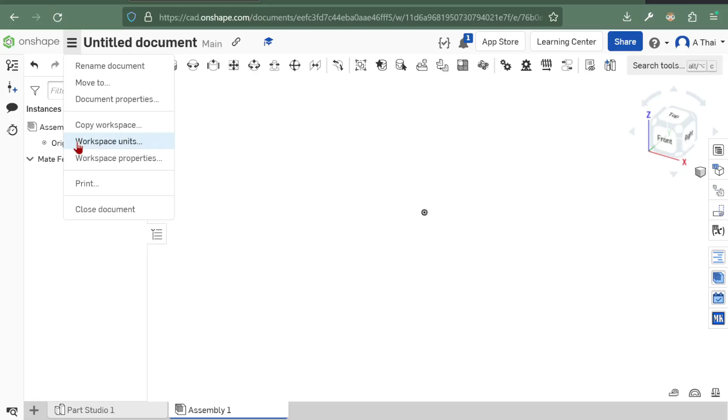Before starting, it will be useful to change the workspace units. Navigate to the 3-bar menu and select Workspace Units. The most important one here is the distance. Click on inch and select millimeter, as many of your parts are based on the millimeter. The mass measurements are not as important to you, but while here, you can change pound to kilogram.

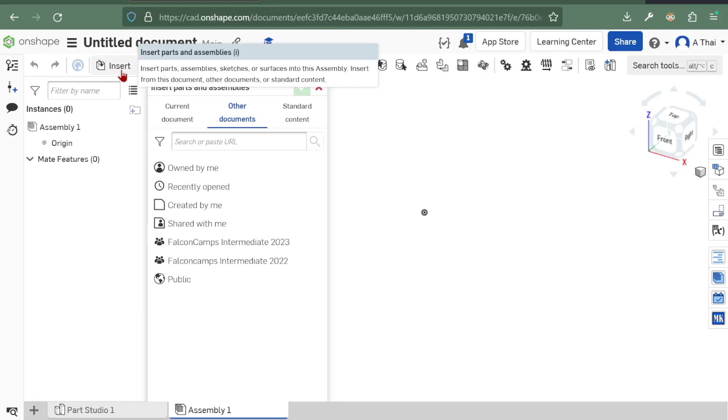Now a search box appears here. You can search for FIRST Global Challenge 2023. Select the option that I do. There are many parts in this document, therefore it may take some time to load here, but it will be much faster after this has happened.

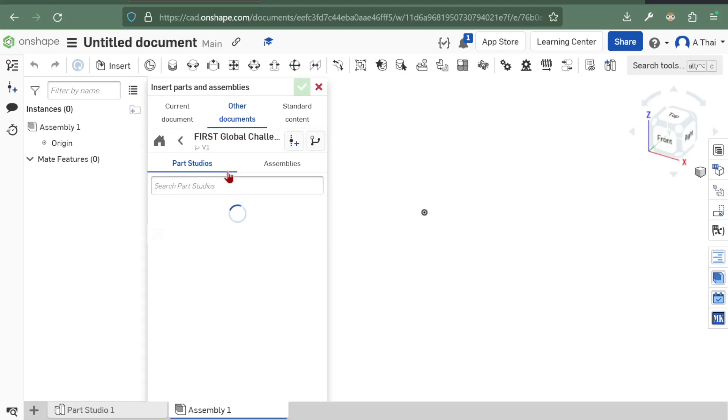Once the list has loaded, we can see and select the parts. To fully insert the part, click on them. Click on the part multiple times for more than one. Finally, select the green button to accept and insert.

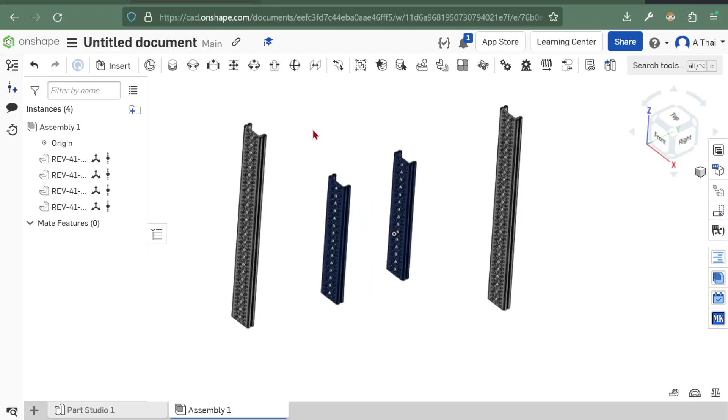Now it is time to connect the parts. This is done with the mates. To begin, open the mate menu by pressing M. There are also toolbar buttons, but there are many, therefore this way is the easiest.

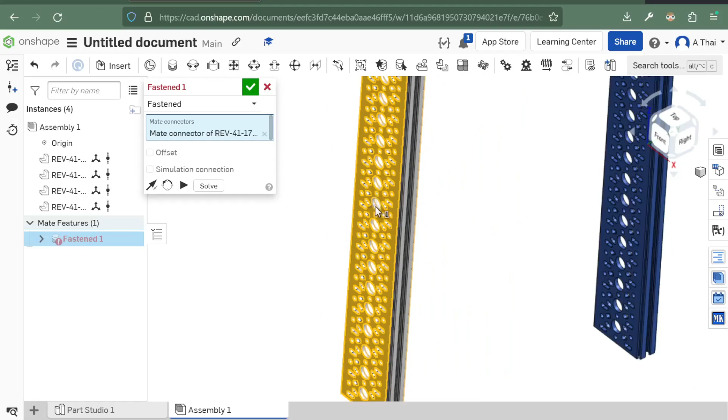You may notice the blue box. This is where the mate connectors will appear when they are selected. Two mate connectors must be selected to complete the mate, and they must be on different parts, because Onshape will not allow us to connect a part to itself.

Moving the mouse over a part, the mate connectors will appear. A mate connector can be selected by clicking on it. Sometimes it can be frustrating to select the mate connector as it will try to show ones on other faces. When this happens, hold Shift on the plane that you want and it will only show connectors on this face.

Next, the other connector can be selected. Something to note is that the first part selected will always move to the second part unless it is constrained by other parts that will not allow it to do this. Only in this instance will the second part selected be the one to move. If a wrong connector is selected, it can be removed from the blue box with the small X.

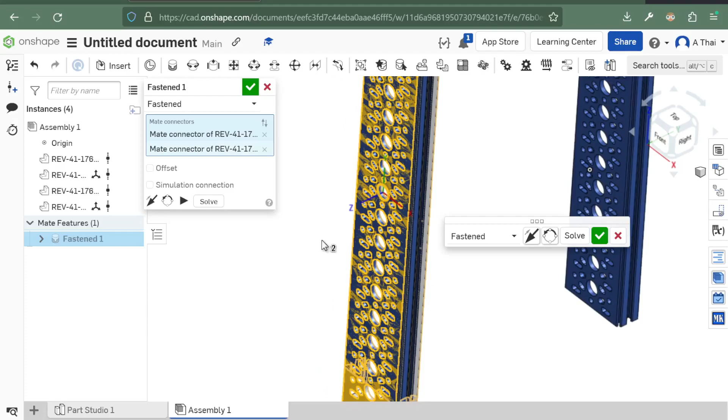Now the parts are connected, but the exact position may not be correct. There are several adjustments that can be made. Flipping the primary axis is done with the straight arrow. This sends the part to the other side of the connector. Flipping the secondary axis will rotate the part 90 degrees at a time parallel to the connector circle.

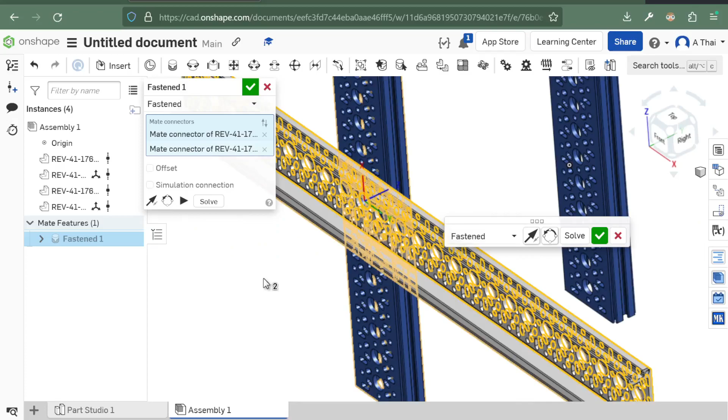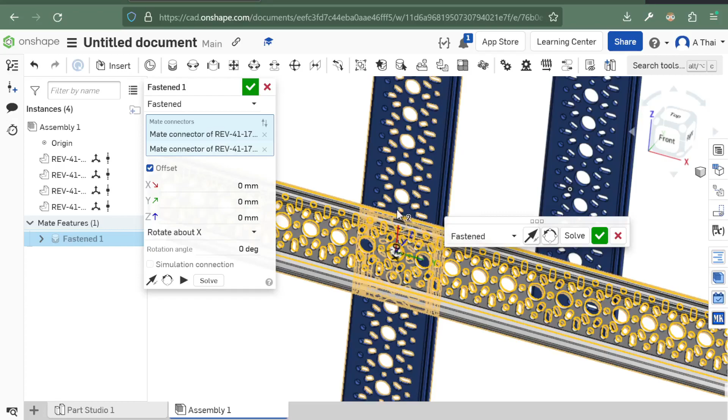Notice the offset checkbox. This will expand a menu with 5 options. The first 3 will offset the part in a direction. These directions can be seen in the axis depicted on the connector: red, X, green, Y, blue, Z. The part can be moved in any of these directions. Usually the direction of the arrow is in the positive direction and the side without is negative, but sometimes it is the opposite. The only way to know is to see which direction it goes.

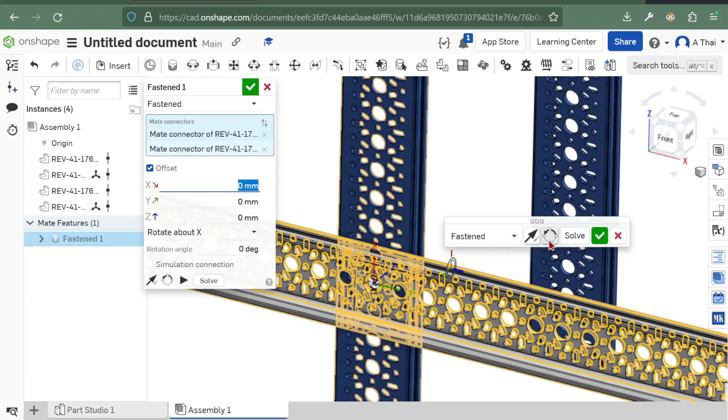You may have noticed that another menu has appeared here. It looks the same as the other one, but is smaller and does not have the offset settings. It is indeed the same and does exactly the same things, with one difference. When you click the green button here to accept, it will automatically open a new mate. That can be useful when you have many parts to connect.

The mate is now ready to accept. The type of mate that we have just made is known as fastened, meaning that it holds 2 parts in the exact position and does not allow for movement. Again, there are many types of mates, but fastened is the one you will use most often.

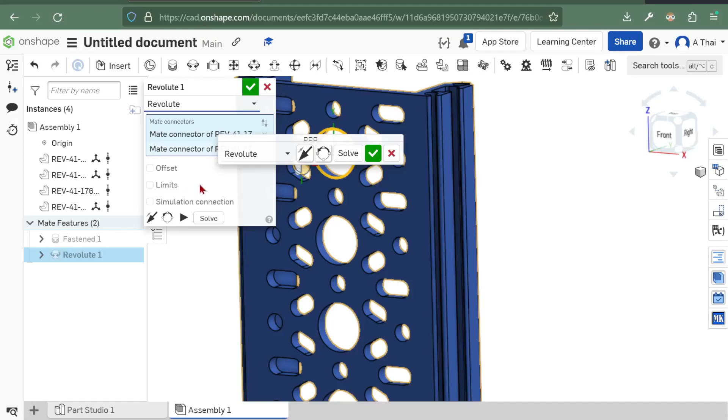The other types of mates that we will likely be using are known as revolute and slider. The revolute type gives the same constraints as fastened, but allows for more rotation on the Z-axis. You can click the play button to see the animation of motion in the types of mates that allow it.

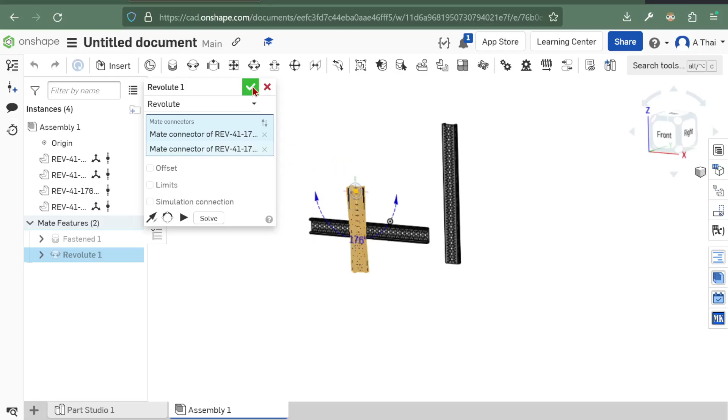The next type is the slider. This is similar to fastened, but the distance on the Z-axis is not constrained.

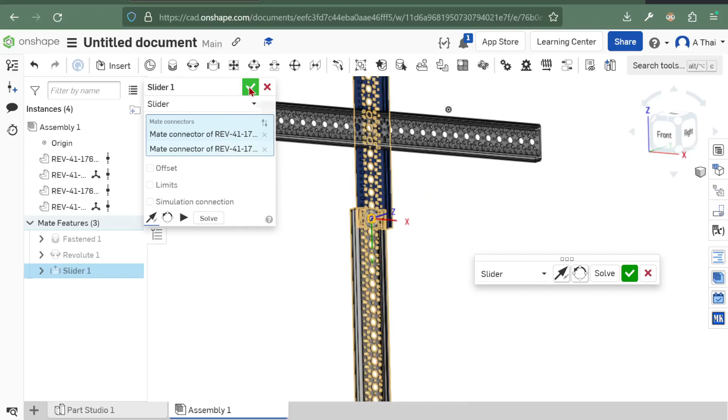It is possible to see how things will move by pulling on them. Left-click and pull a part to see how it moves or does not move. There's a problem here: all the parts are moving, and we cannot see them move independently.

Right-click on a part, preferably the most central one, and select Fix, which is a black bar and some diagonal lines for an icon. This part is prevented from moving, and the others can be moved independently. To allow everything to move again, right-click the same part and select Unfix.

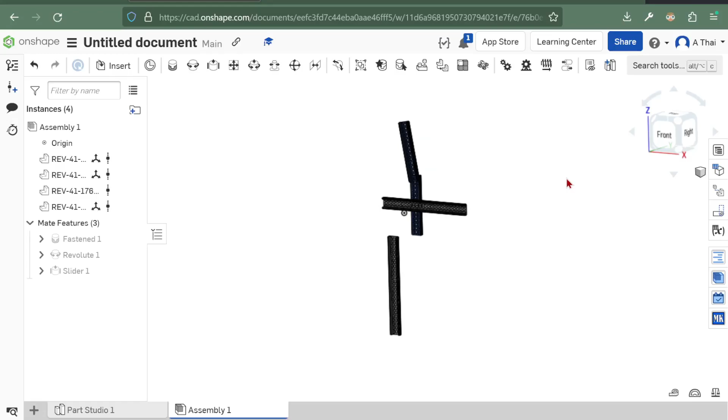The final tool in the assembly that will be useful to you is the measuring tool. This appears in the bottom right corner and looks like a spool of measuring tape. Click the measuring tool and a window will open.

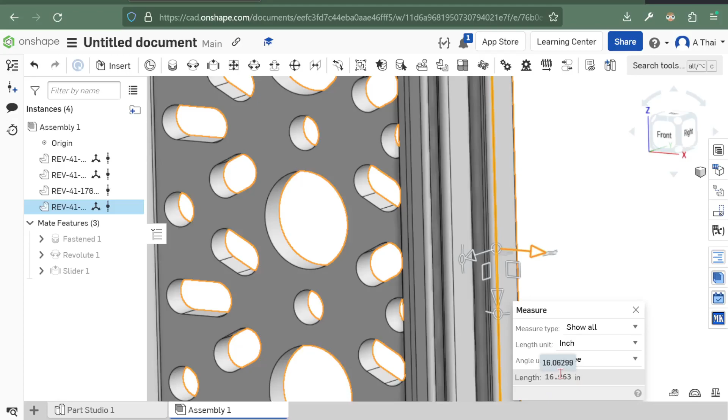One thing to measure is the distance of one line on a part. Move the cursor to that part and the lines will highlight orange. Click the line that covers the distance you are measuring. This distance will appear in the measurement window. Here it shows only one measurement, but for more complicated measurements there will be additional information.

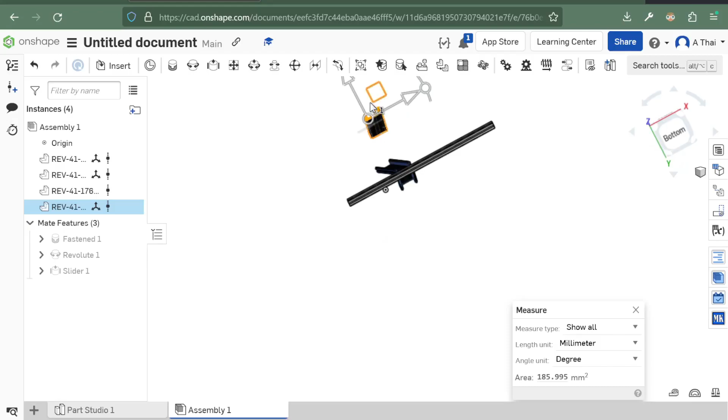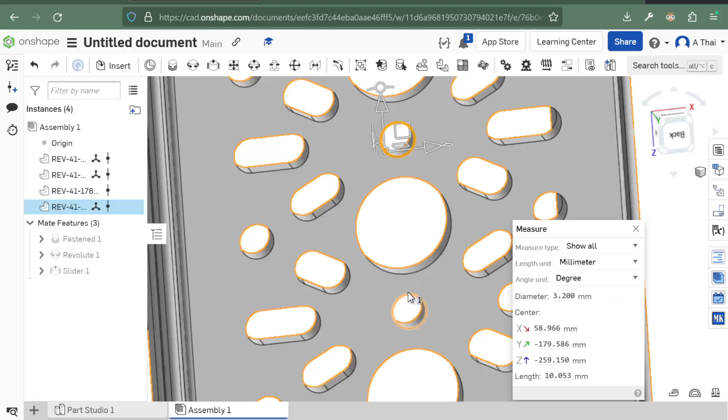The final type of measurement you'll be doing is between circles. By clicking on two circles, the distance shown is known as center distance. This is the distance between the centers of each circle. There are many more functions inside the assemblies, but these are the ones that are most relevant to what you'll be doing.